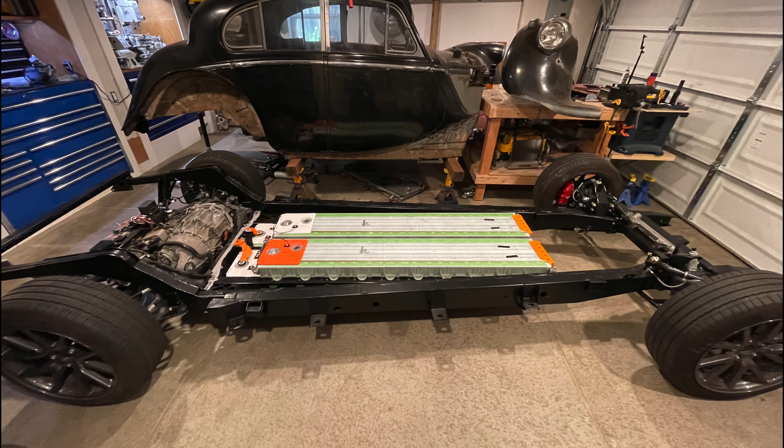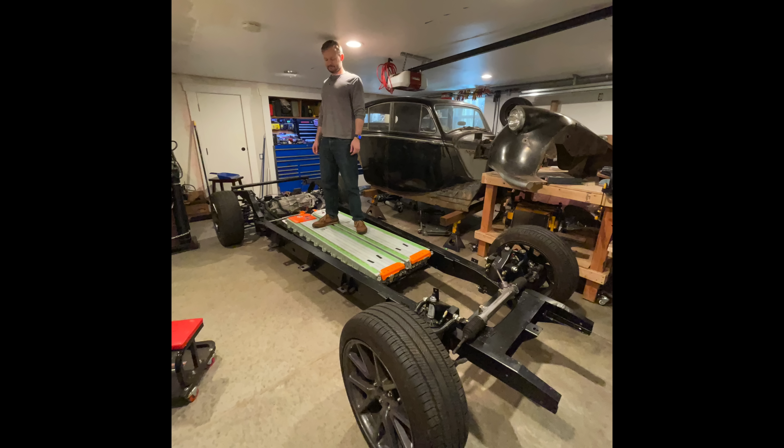That's today for me. A rolling chassis is a car without the bodywork that can roll, meaning it has the wheels and suspension and it's all tied together with a frame. Sort of like a really unsafe soapbox derby car. Some people differ on this definition, like Wikipedia, which says the car has to be able to move under its own power, which is absurd. That's a running chassis, not a rolling chassis.

GM will sell you a rolling chassis Camaro that has the entire suspension and the body, but no powertrain. This makes sense. The Camaro is a unibody car, so you kind of need the body to connect that all together. Anyway, somebody go edit Wikipedia while I talk about this rolling chassis right here.

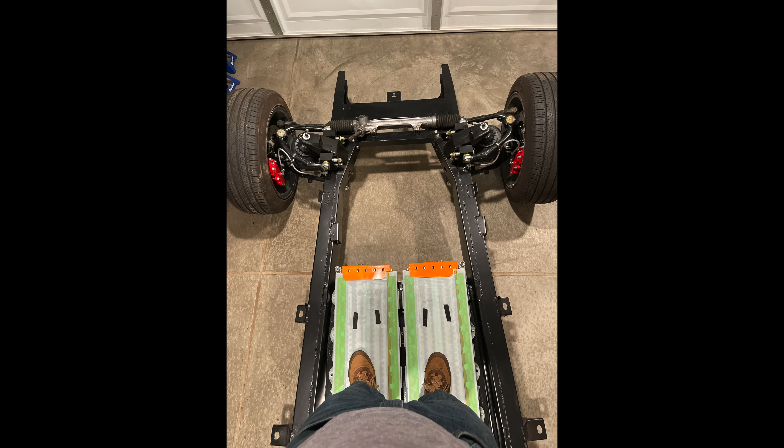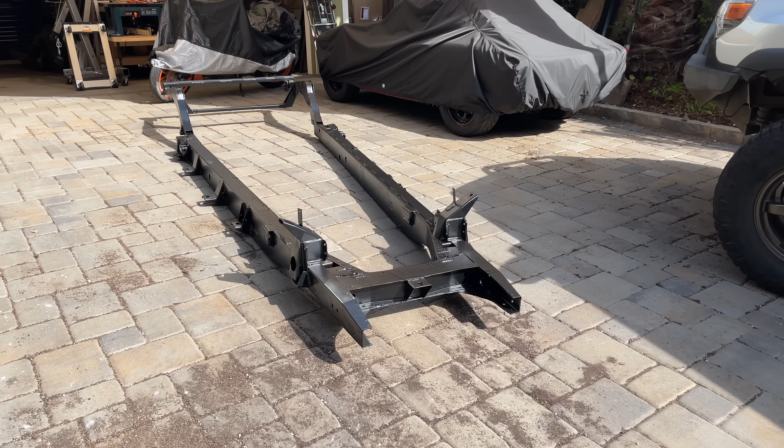What we're really talking about here today is the front suspension. The rear suspension is all taken directly from the Tesla Model 3, except for the springs and dampers. I used coilovers because it was just way easier to package them. The frame that connects it all together we talked about a few weeks ago, so to round out the rolling chassis, we really just need the front suspension.

I mentioned in one of the earlier videos that I was planning on using Mustang II suspension. This is super common in the hot rodding community, so common that there is a gigantic aftermarket for the Mustang II parts. I wanted to tap into this aftermarket for 3 reasons. 1, it's gigantic. There are all sorts of parts and systems available at all sorts of costs and quality.

2, I know that geometry works decently well, and I don't really want to design a suspension from the ground up. Suspension design is one of those things that's great if you really want to geek out into it, but it's kind of maddening if you just want it to work. Change one thing and it will affect everything else. Shorten your control arms and you've changed your roll center, your camber gain, your Ackerman, and now you have bump steer.

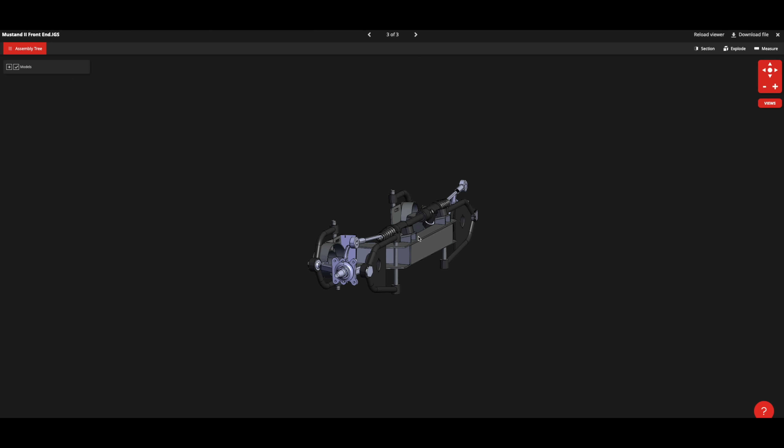The third reason I wanted to use this suspension is that it's fairly similar to the suspension that came with the Jaguar. This will allow me to use the existing shock towers and the control arm mounting points. The original Jaguar suspension is actually a pretty great design. I didn't reuse it because I didn't trust the strength of it given its age.

Also, the upper control arm was way shorter than the lower, so it ended up with tons of camber gain when you go around a corner. This is probably a good design on those old round tires, but not so much on the newer, fatter rubber. There are some issues with using the Mustang II suspension. It's not really made for a car this heavy. Also, it's a little sloppy and pretty old.

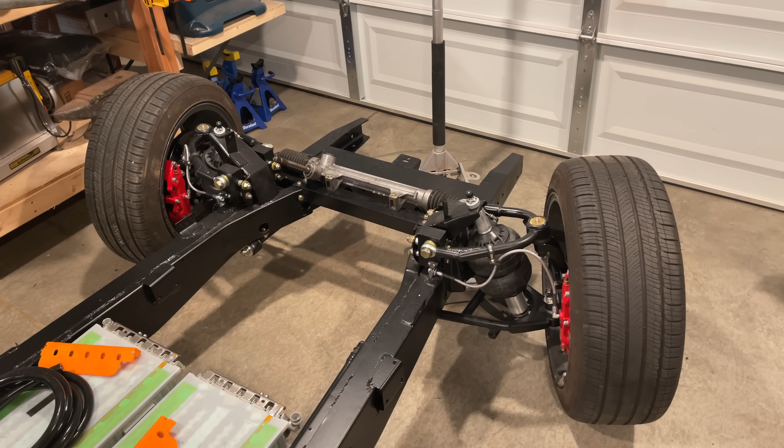But I'm not using suspension from a 45-year-old compact Ford. I'm using parts from the gigantic aftermarket. There are no Ford parts on this suspension. It's all made by RideTech, Wilwood, and me. In fact, I'm not going to call it a Mustang II suspension anymore. I'm going to call it a Mustang Jag suspension. I'm going to have to work on that name.

Anyway, the idea was that I could buy all these aftermarket parts, bolt them onto the car, and I wouldn't have to change anything. If you've been following this build, you've probably figured out by now that by the time all of the parts came in, I had changed everything. Well, not everything, but a lot of things.

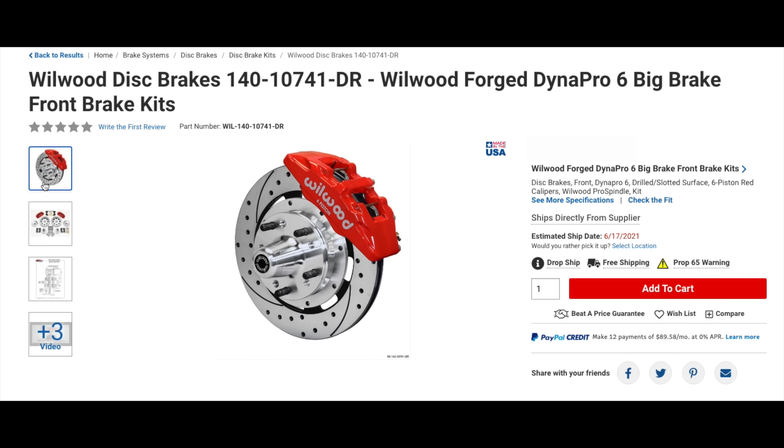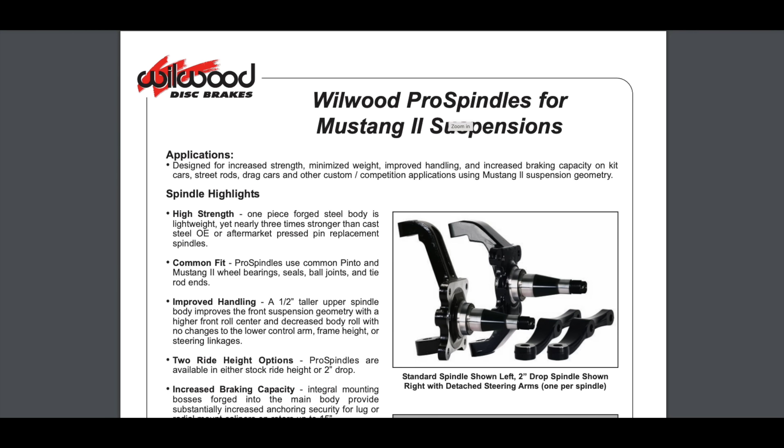The first thing I ordered was the brake system, which is good because it was back-ordered for several weeks. Wilwood has a great spindle for the Mustang II geometry, the Mustang Jagometry. It's a one-piece forged steel spindle with a removable steering arm. I got that and some pretty shiny red calipers around 12-inch rotors. 12-inch seemed adequate and will allow me to put 15-inch steel wheels on here should I choose to do so.

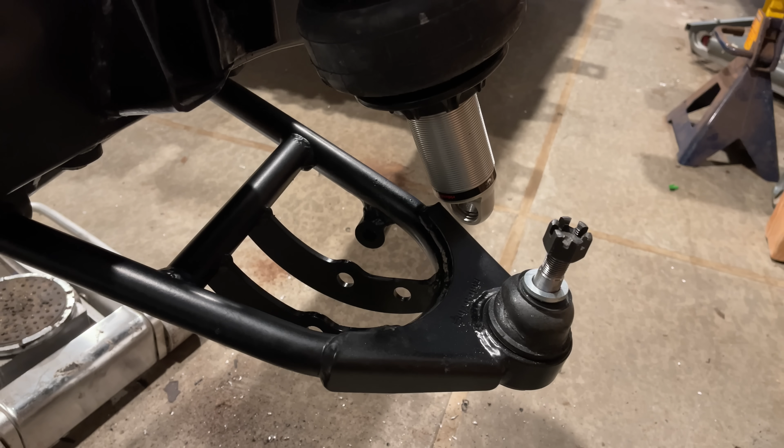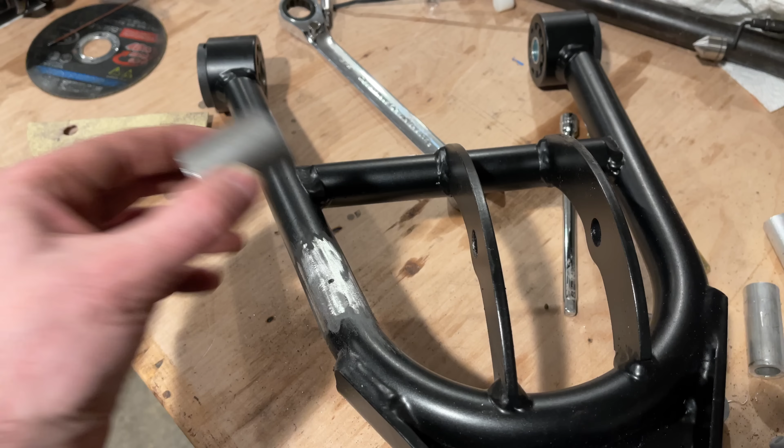The lower control arms are strong arms from RideTech. These things are beefy, real strong, also real expensive. I had to modify these slightly. I'm trying to reuse the Jaguar shock towers, which is a little bit rearward from where the shock towers are supposed to mount. The lower shock mount goes between these 2 bars here. I welded on a collar so that I could move it to this side between this bar and this collar. Then I just added a sleeve between the 2 bars and I ran a really long bolt all the way through.

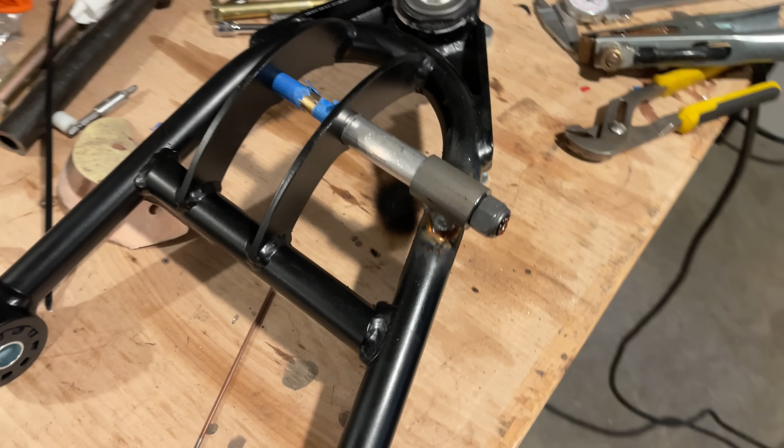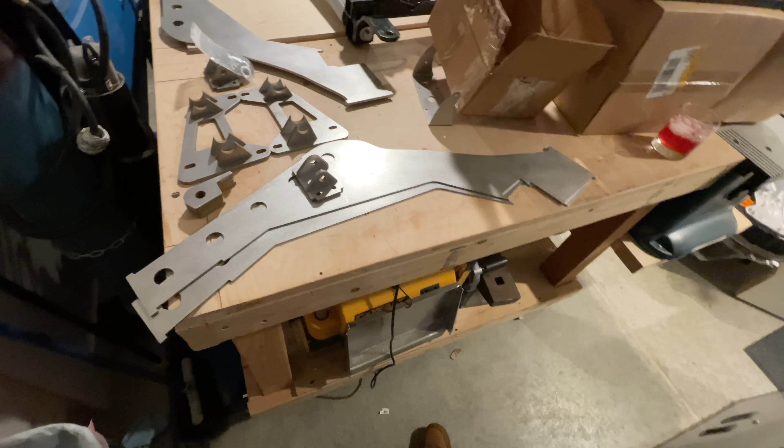After that, I painted that up and I was done with the lower control arm. No more changes there. Totally done. To attach the lower control arm to the frame, I needed some sort of pivot axis. I designed a steel piece that held a tube in the right location. I had all these pieces waterjet back when I had the frame modification parts waterjet. There are some slots in here, so this will slide in and out for a bit of adjustment. I reused a couple of the bolt holes that were originally used for the Jaguar lower control arm mounts. I also added a couple for safety.

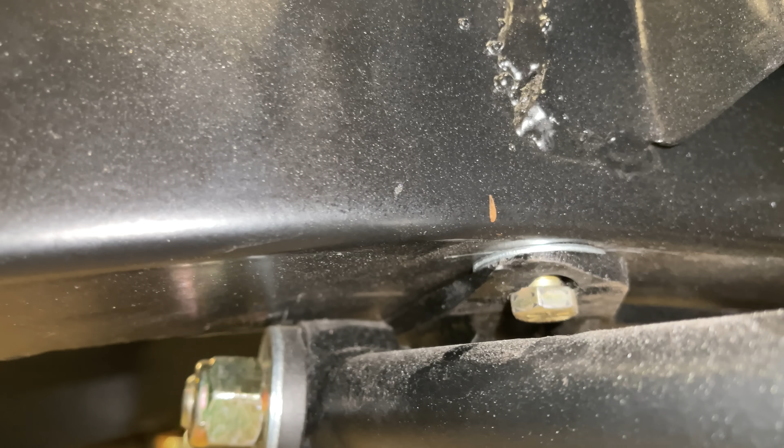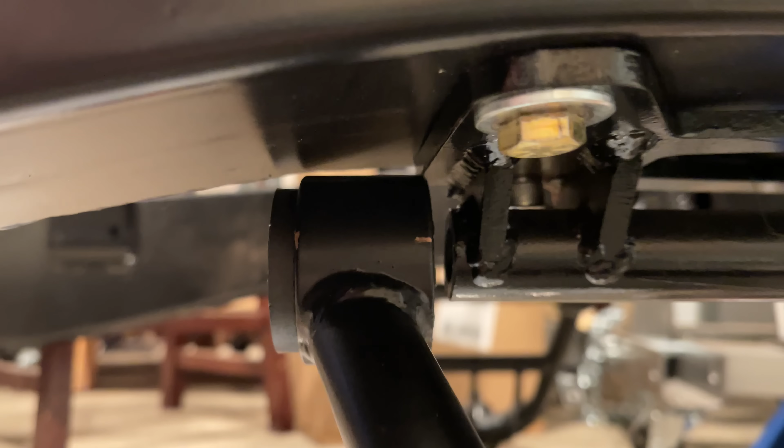These worked great without any modification, until I put them on the car and realized that my lower control arm articulated right into this corner. So they came off and I sanded down that corner. I still need to drill a new mounting hole to move this bolt. I added washers on the side so that I could slide the lower control arm forward or backward, more adjustment, and it was interfering with the mount in its most forward position, so I fixed that. These things are pretty heavily built, so I didn't worry too much about cutting out this metal.

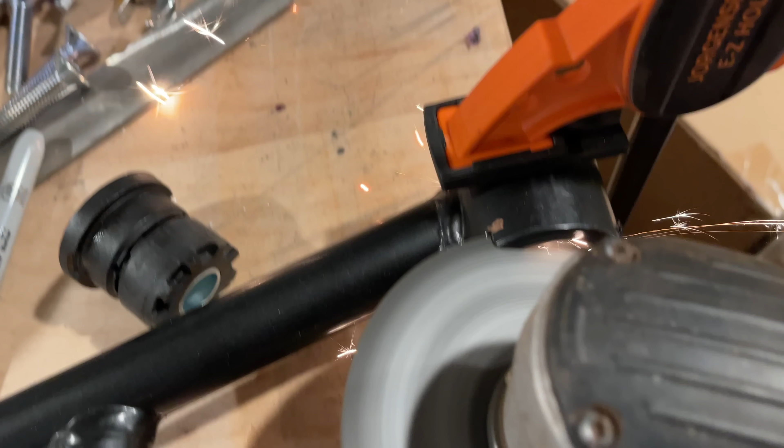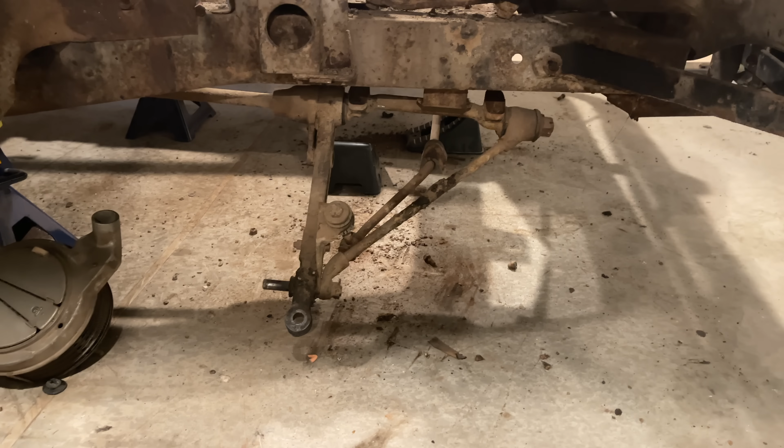The upper control arms didn't play so nice with the mounting. The inboard axis was going right through this flange. I needed to move it in or out. Out would have made mounting a lot easier. In fact, it would have been almost the exact same mount as the Jaguar originally had. I didn't want to do this because a shorter upper control arm would cause things to change a lot more as the suspension moves. As we already discussed, the original Jaguar suspension had a very short upper control arm. Too much camber change, so I made the control arm longer. This was only one of two notable changes in suspension geometry.

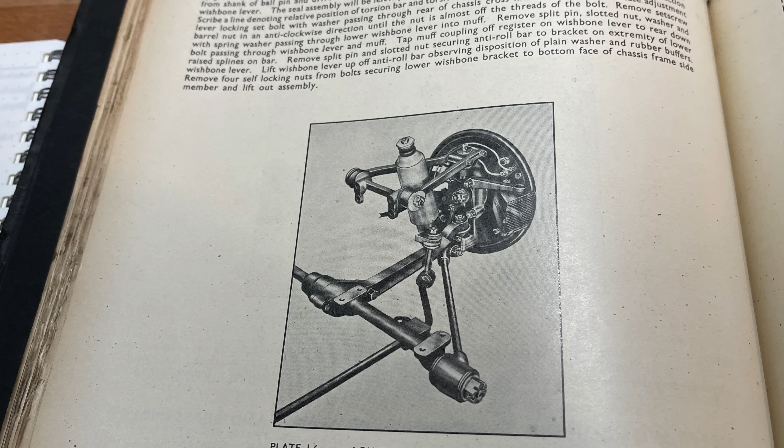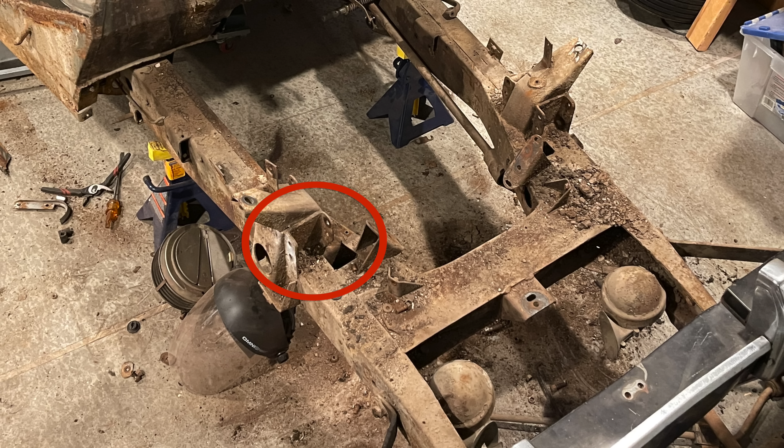Neither were very significant. Since there was all this metal in the way, I couldn't just use a long tube with some metal welded to it like I did with the lower control arms, but that's fine. I decided to just bolt some blocks of aluminum between these two flanges here. That way I can drill and tap holes wherever I want the pivot to be. This allowed me to do the other small change in geometry. I added some anti-dive, just a smidge. This will help keep the car from feeling like a pig under braking. These blocks also make it really easy to change the geometry in the future. This is a good thing because I didn't actually do any kinematic analysis when I added that anti-dive, so it's entirely possible that I just fucked everything up.

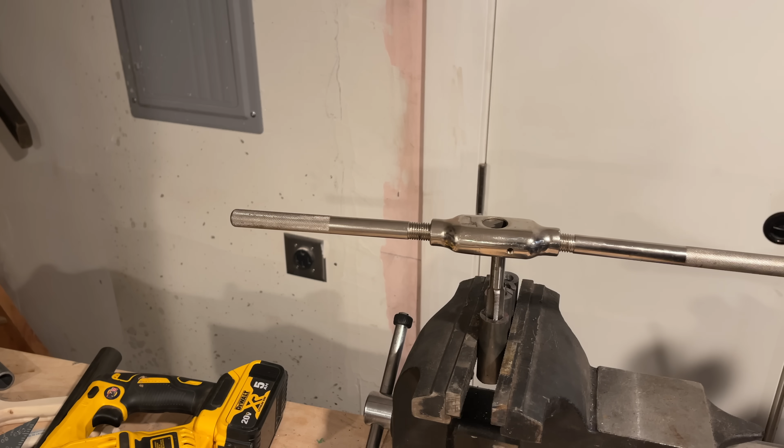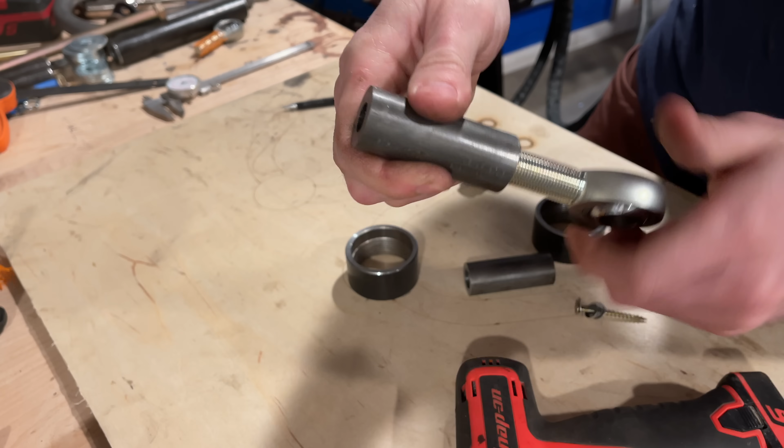Anyway, all these changes meant that I had to redesign and custom build upper control arms. Control arms are pretty straightforward, and I think I might do a video on how to design and build them in the future, but here's the basic idea. The two inner pivots are threaded rod ends. These are great because you can get them in whatever size and strength you need, and they're adjustable. I can thread the rod end in and out to lengthen or shorten the control arm so I can change camber. I can also lengthen one and shorten the other to change caster.

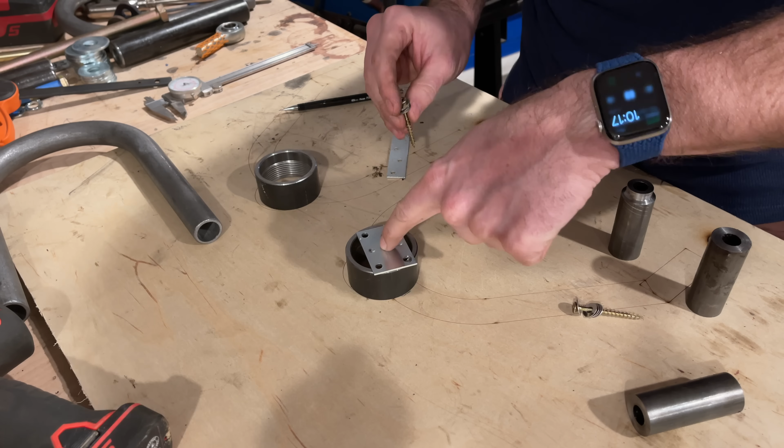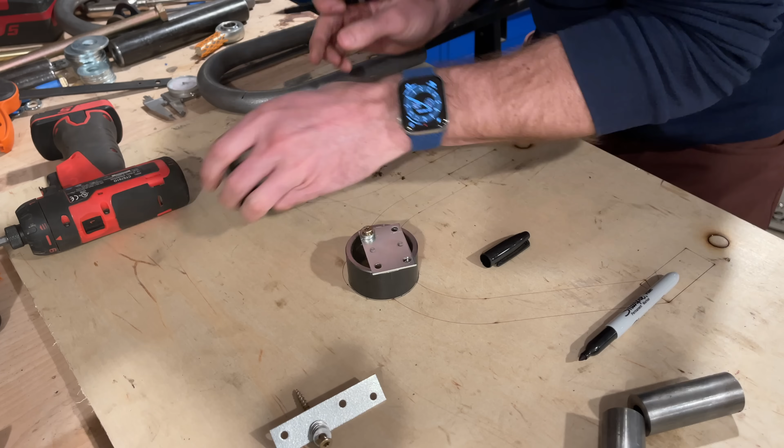I know this will change the geometry, which I specifically said I don't want to do, but a little bit of adjustment is always good. The stock caster on the suspension is pretty minimal, and I prefer to have a little more snap back to center in my steering. The outer ball joint is just the Moog joint that everybody uses for this type of suspension. Weirdly, it came from a Chrysler.

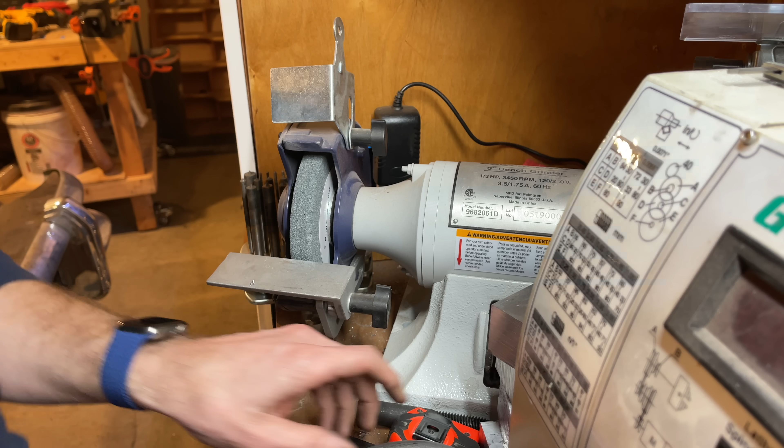It was about this time that I thought it might be cool to use air suspension on this car. I've never been much into air suspension, but I think it might be pretty cool on this car. So I checked a few air suspension setups and I designed the upper control arm for a little more clearance.

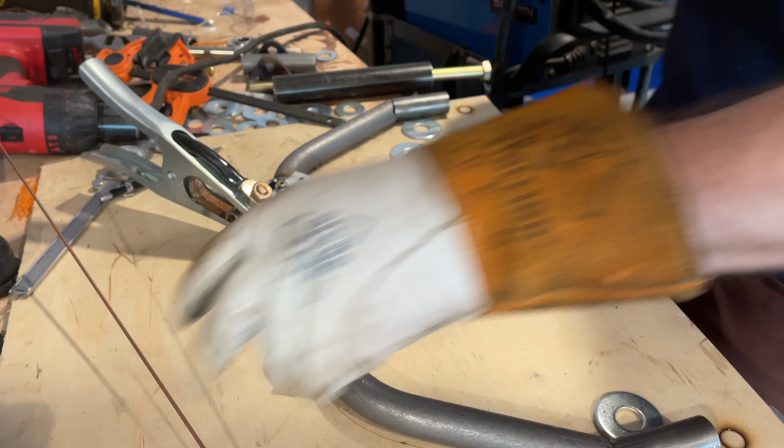This meant that the A-arm was less of an A shape and more of a D shape. This is not ideal because the load path is not direct. The arm wants to bend whenever you go into a corner. This is a less efficient design, but it's not a deal breaker.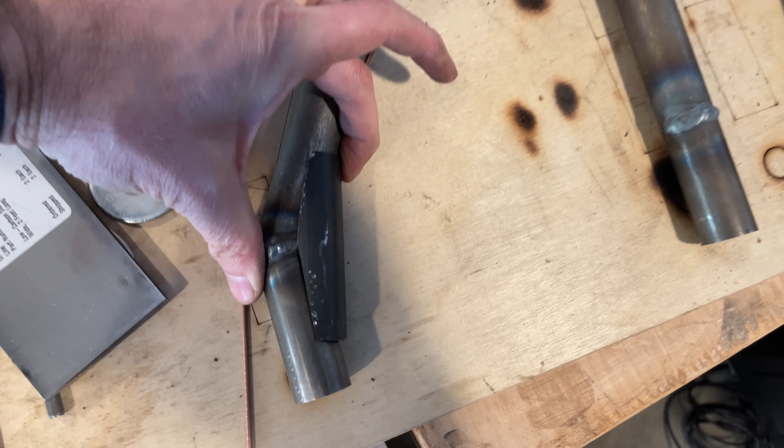I went with a wall thickness of 1/8 of an inch. To get this bend, I just bought a couple of driveshaft loops that were already bent. I lasered the pattern on some wood, cut everything to size, and welded it all together. I added a bit of reinforcement at this weld over here to get more strength. Then I was done with the upper control arms.

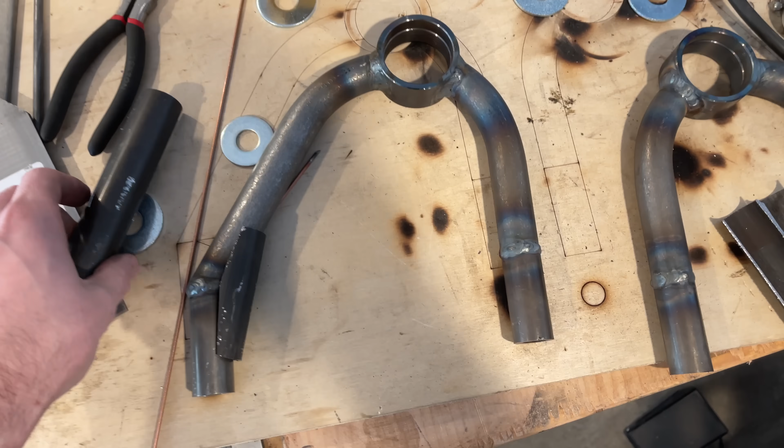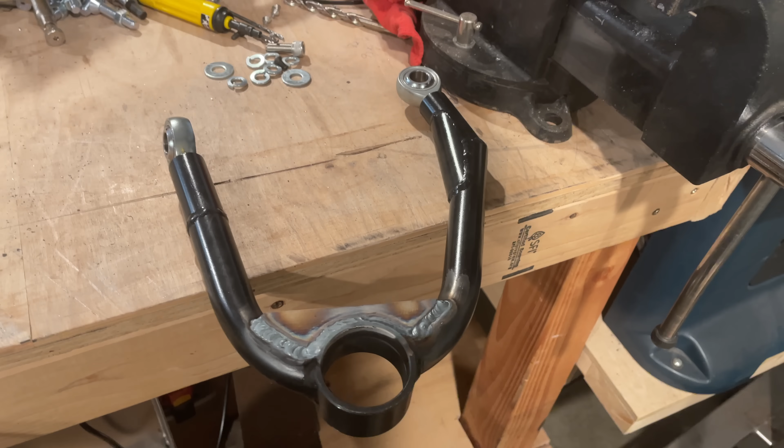Later, I realized I didn't like this joint here. It seemed weak, so I took the control arms off, sanded the paint off, and welded in a reinforcement. Then I was done with the upper control arms. But then I decided I didn't really like this connection here. It's probably fine, but I went ahead and welded a sleeve over it. Totally done with the upper control arms.

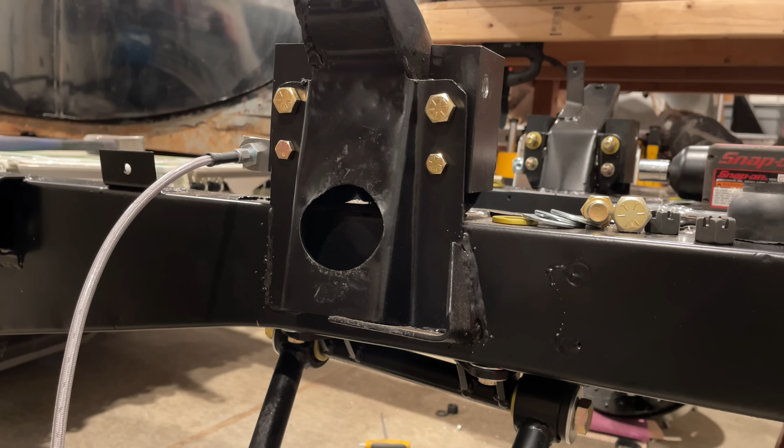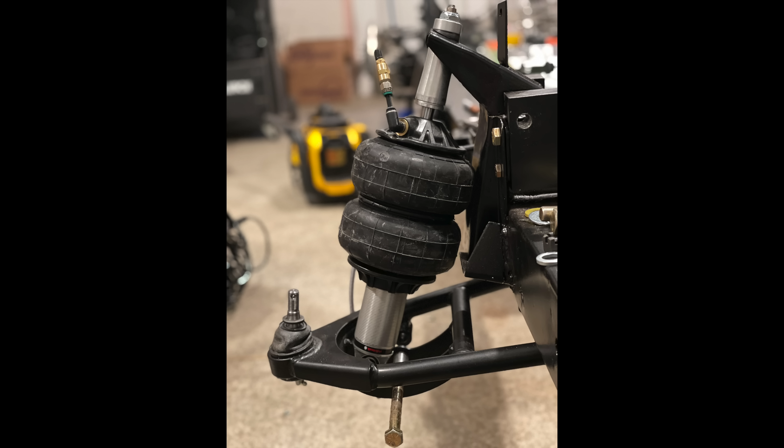And then my air suspension came in, and that just fucked everything up. The biggest interference came with this part of the existing Jaguar shock tower. That was a pretty easy fix, using a tool that I like to call the Chief Engineer. But the inflated bags were still too big. This meant I would either need to relocate the upper mount or relocate the lower mount.

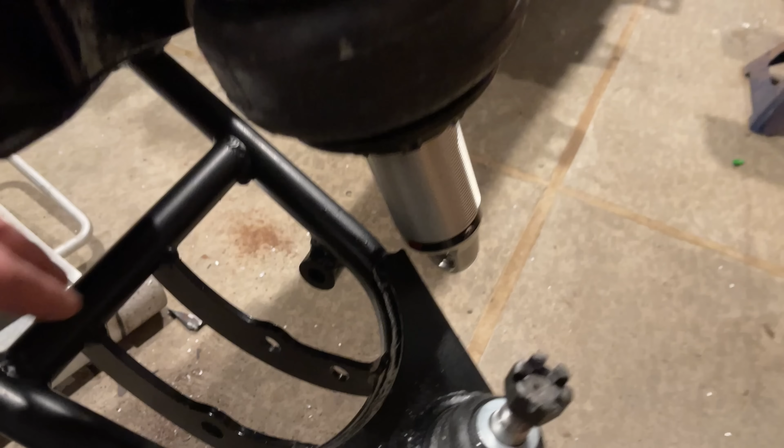I already relocated the lower mount once on the lower control arm, so why not do it again? Why do something once when you can do it 3 times? The shock was originally intended to be mounted here, but then I added that collar so I could mount it here. But this time I drilled new holes to move it back between the original bars, but farther outboard.

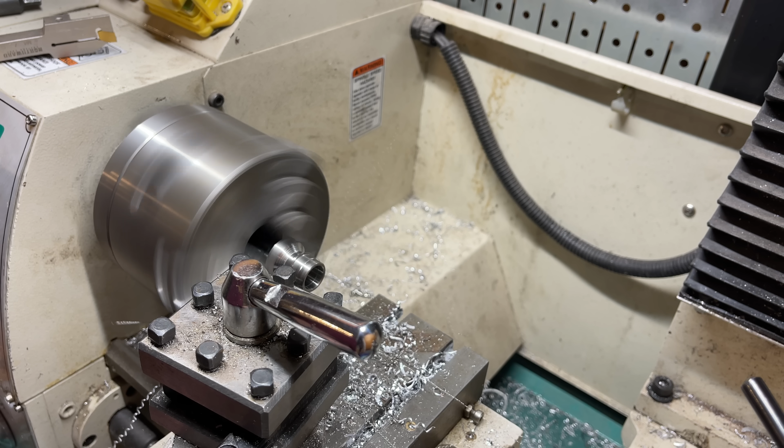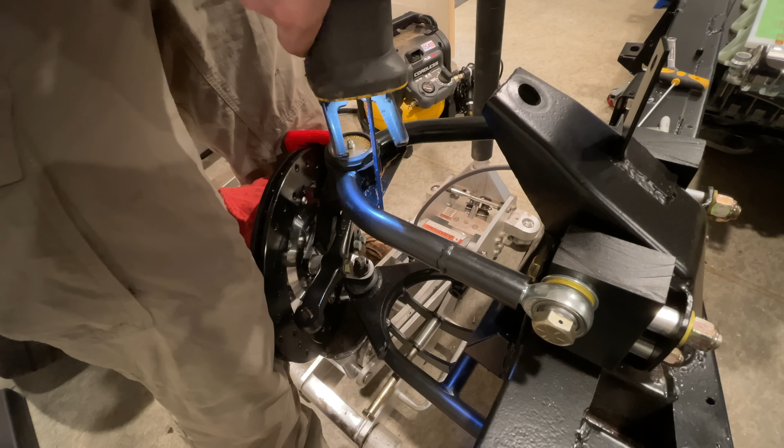With the mount moved outboard, I needed to get some high misalignment bearing adapters, which are just little extensions that allow the bearing to move a little bit more than it normally does. These, of course, did not fit, so I had to break out the lathe and make them fit. I also needed to make some minor adjustments to the shock, slightly voiding my warranty. After that, I noticed my added reinforcements for the upper control arms were interfering, so I had to pull those off and modify those.

I also managed to get a bump stop in the same location as the original Jaguar bump stop. I got some load-rated bumpers and screwed them in to the old location with a couple washers to get them at the right height. Then it was time to make an actual rolling chassis.

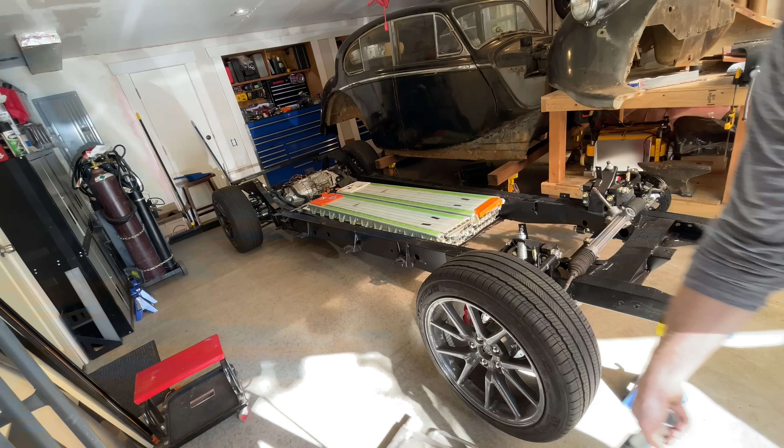I added the wheels and lowered the car onto its suspension, except that I needed to move it away from the body to get the left front wheel on, but the parking brakes were engaged, so I couldn't slide it. If only I had something that allowed me to move the... Oh wait, there's that thing I invented. Once it was on the ground, I put some air in the front suspension so that it wasn't resting on the bump stops, and voila, rolling chassis.

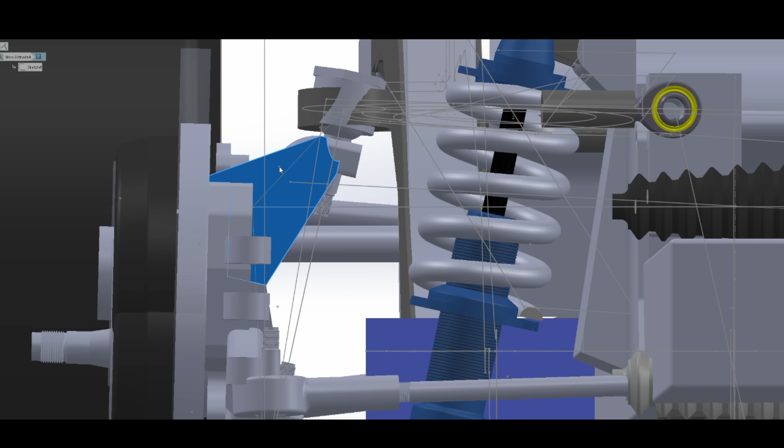After that, I was done and there were no more modifications to be made. Well, maybe one. Two, actually. I'm going to get rid of the old spindle and I'm going to build a new upright so that I can use the Tesla hub bearings, but we're going to talk about that at another time, mostly because I haven't made it yet. Also, it's kind of an unnecessary upgrade. Everything works the way it is. The suspension that I chose so that I didn't have to customize it and then proceeded to change everything.

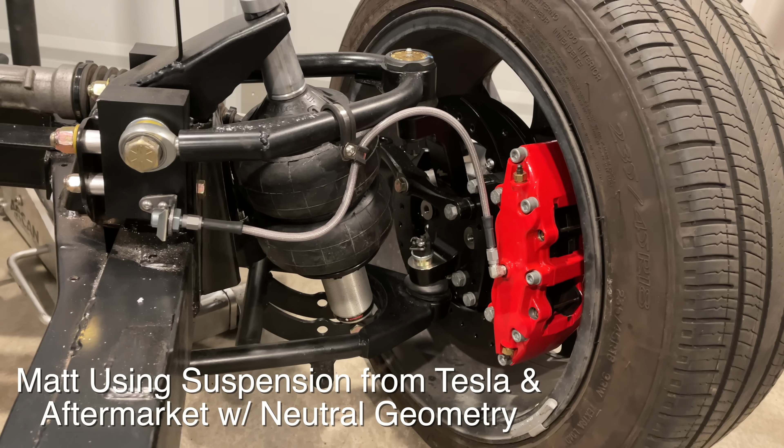With all these changes, I really need a new name. It's pretty far from Mustang II. It's kind of a neutral geometry, and I'm going to be using parts from Tesla and the aftermarket, and it's mine, so we'll just call it the Matt Using Suspension from Tesla and aftermarket with neutral geometry. And since so much has changed that it really is the second iteration, we'll add a 2 at the end. Then we can shorten it up by taking the first letters, and we'll call it the Mustang II. God damn it.